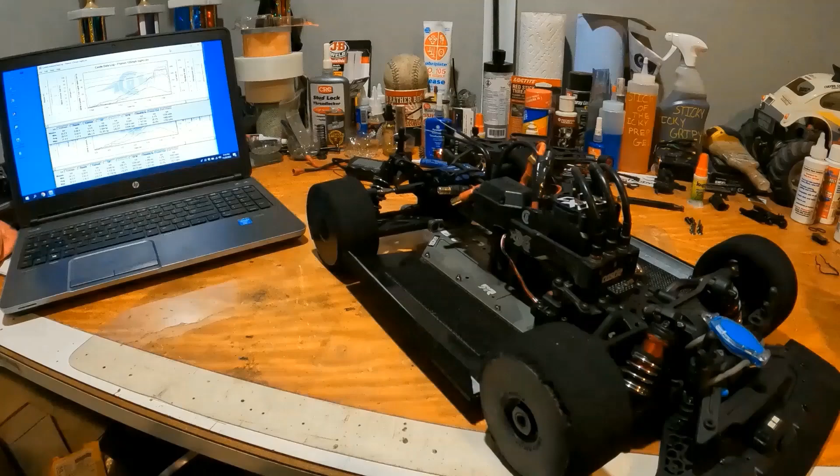What's up YouTube? If you guys want to know about the Typhon build and a bit more detail on the parts on it, how it's set up, and a few things as far as clearances, tolerances, front end, spoilers - I made another run on it the other day and came up with an issue with the front differential, which you'll see, but I did manage to get out and make a better pass with it.

I do have the perfect pass in it now, so after you guys check out this video we'll get back to it - it's just a pass I made the other day. Now that I have perfect pass on, I want to go over some data log as to what I was talking about in the crash video from the other day, as far as the difference between running perfect pass and not, and why I specifically wanted to run it in this car. So without further ado, check out this shot.

Start, stop, read. Oh no, oh crap, there it goes. All right, track, start. Motor check. Yeah, it's good, okay. Nope, back to where you were. All right.

Something's wrong. All right, so here we go for the data log, and I'll try to give you guys a shot of what I was talking about.

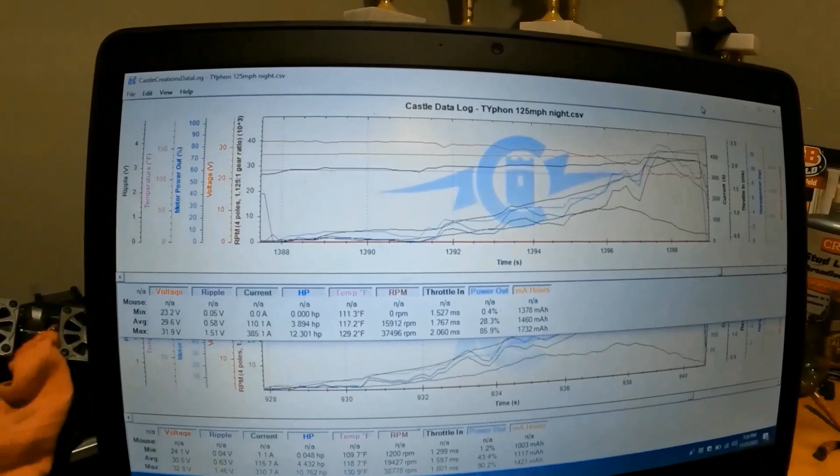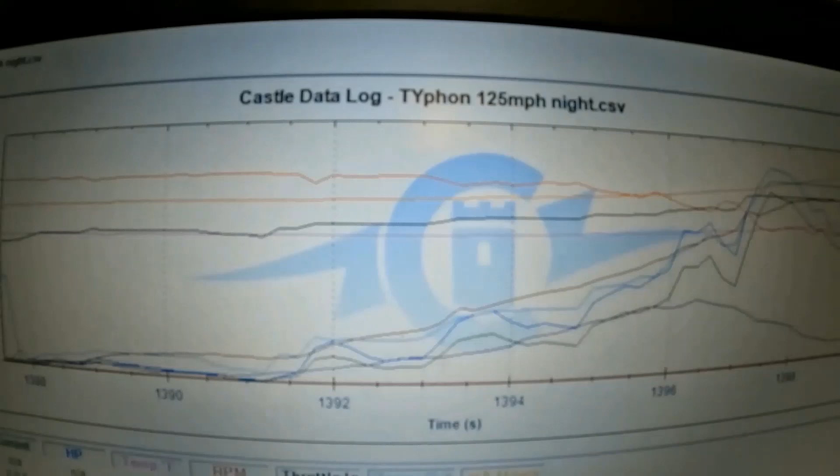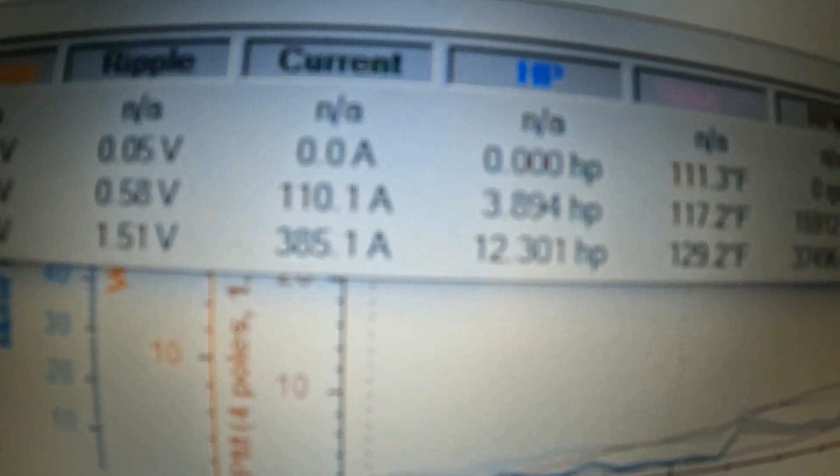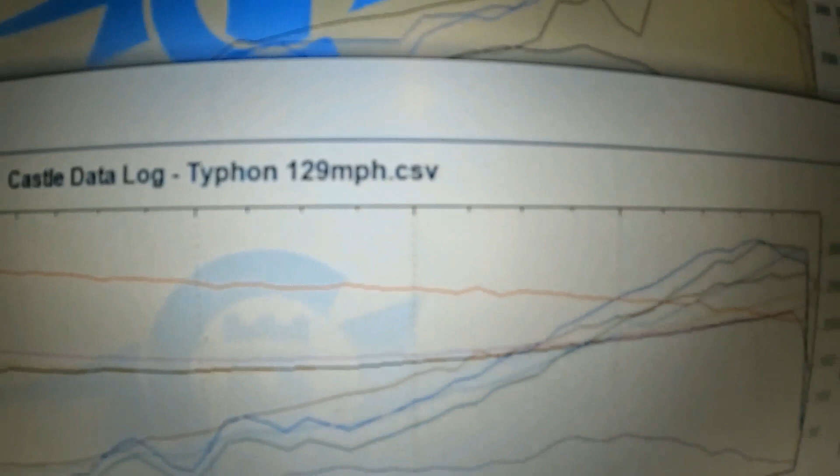So the other day I went and hit 129 miles an hour. This is my 125 pass from the night run video, the first one, which most of you have probably seen. I want to point you toward this amperage - 385 amps at 85.9% power out. Now check this out - this is the 129 pass, and this amperage is only 310.

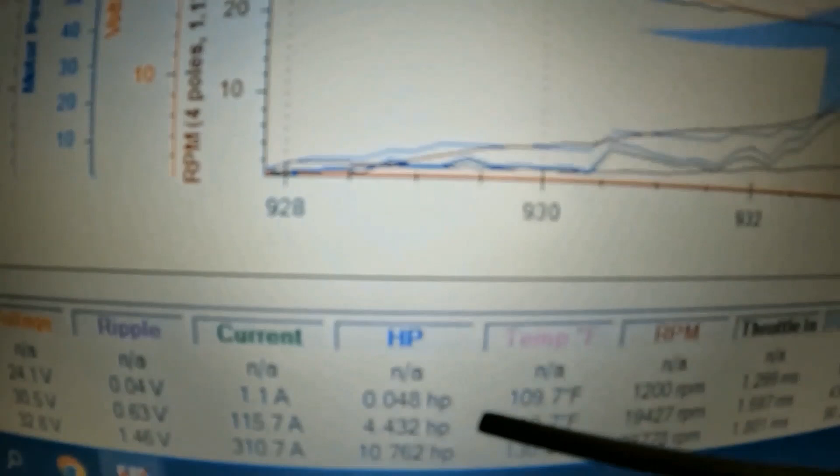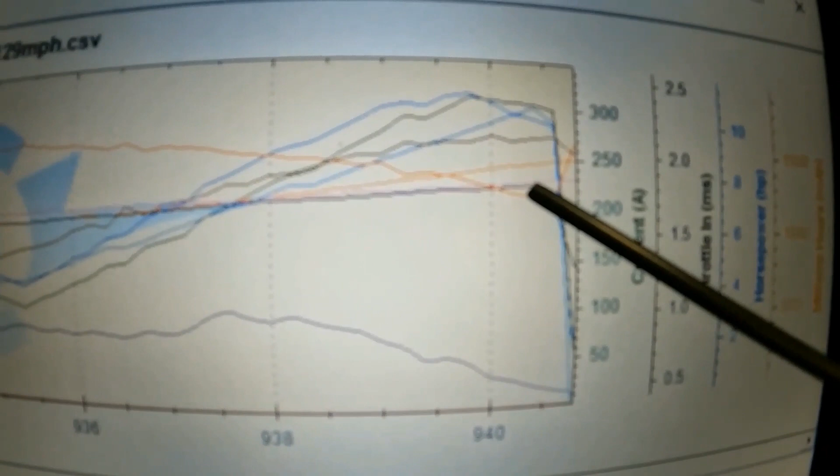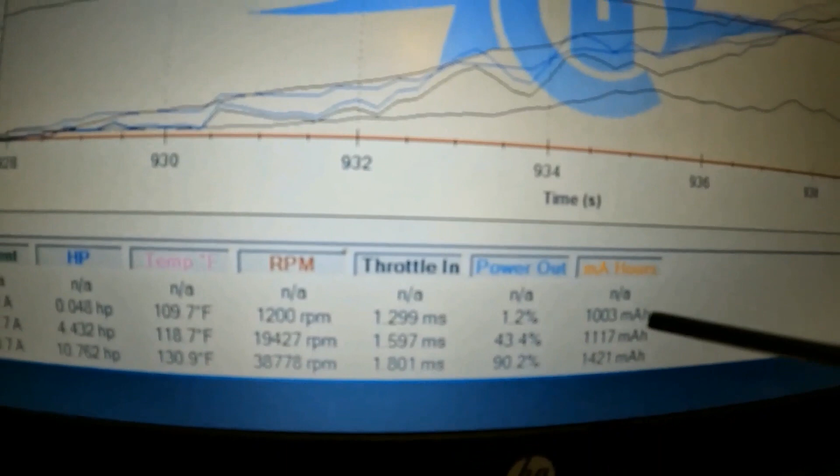So on that note, if you see this black line, it's always linear, nice and smooth all the way up. And guess what - this is at 90% power out, and it only pulled 310 amps. So that is what I was talking about in the other video, in the crash video.

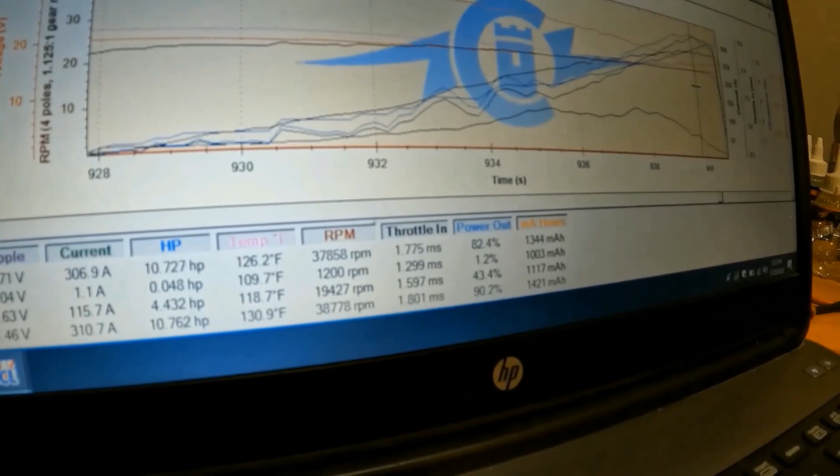To give you guys a better idea, I'm going to put the mouse on 85% to show you, and this is with the same batteries. This pass with perfect pass had fully charged China Hobby Line 6600 milliamp batteries in it, so 85.8 is about as close as I'm going to get it.

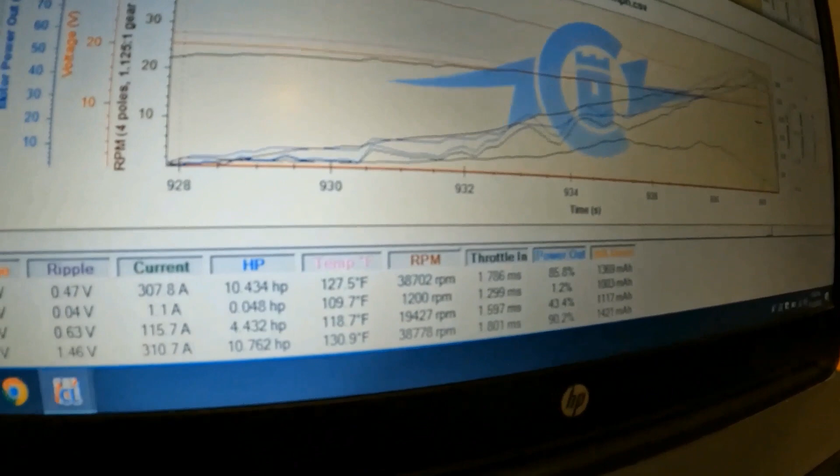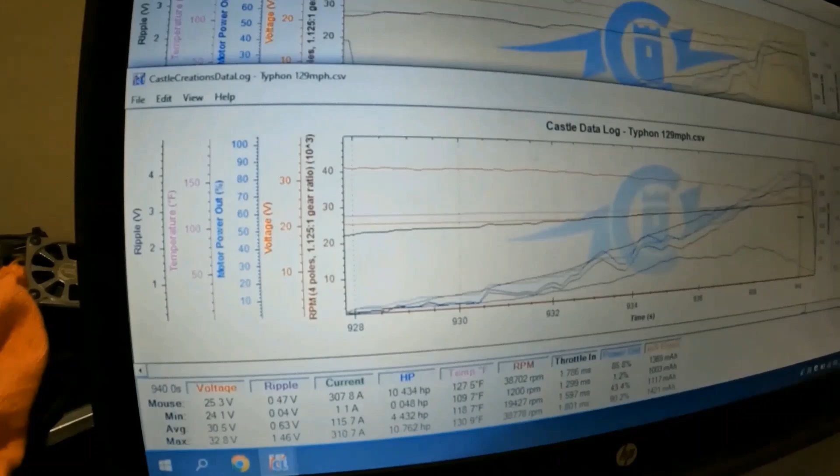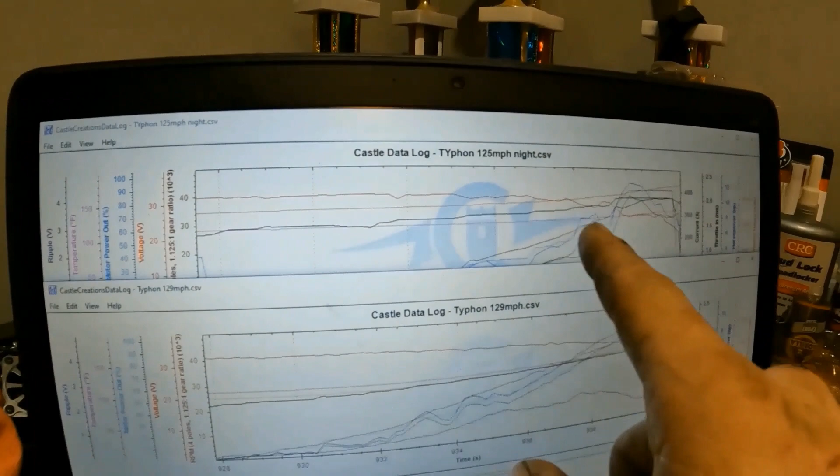These 6600 milliamp China Hobby Line batteries, I was running in both of these passes, so there was no difference in battery, no difference in gearing. It was the same car, same setup, same batteries. The only difference was the 125 pass - those batteries had a few runs on them, some back and forth before that pass, before I made that last one, like I stated in the video.

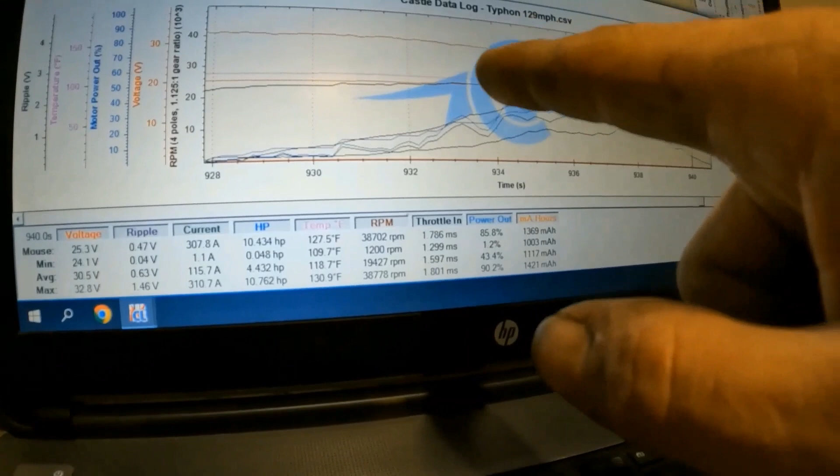There was one short pass with a car coming. Car came out at me in one direction, so I shut down, and then let's see how this goes. 1721, 8S Typhon.

Whew, man. And then I made a second pass - it went 120, but I was pulling hard to the right. It is 10:30 at night, about 28 degrees out, Monday night.

Glad I let out of that one. She was pulling hard to the right.

Alright. See what we did this time. Come on, get over here.

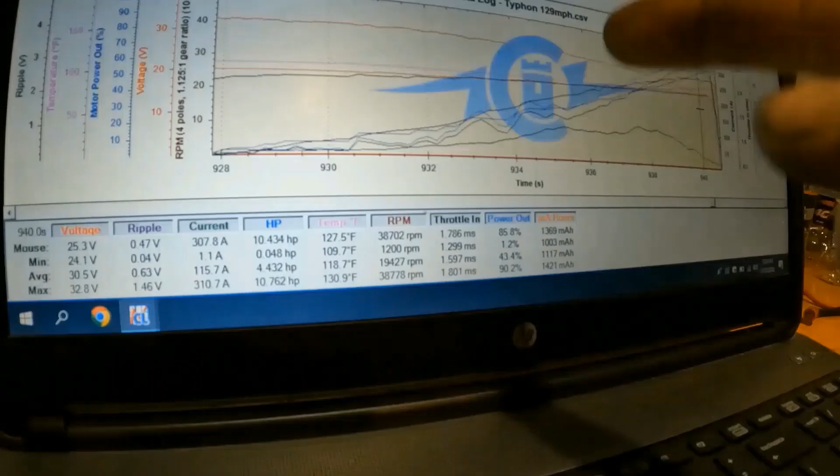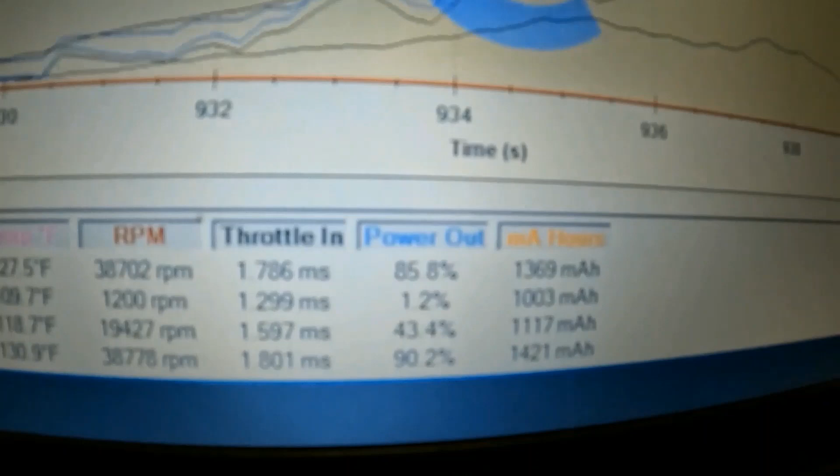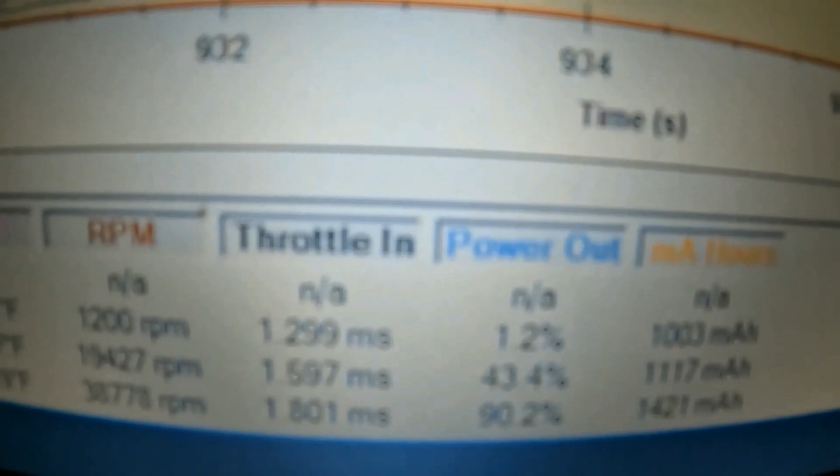And I took my mouse off, so now it's not going to show it, but you guys get the hint. I just showed you, so I'm not hiding anything. I don't have any reason to lie. I do this for fun. I do this because I love doing this.

I am going to go back to that because I want to point out one more thing real quick, very hard to do. Alright, 85.8.

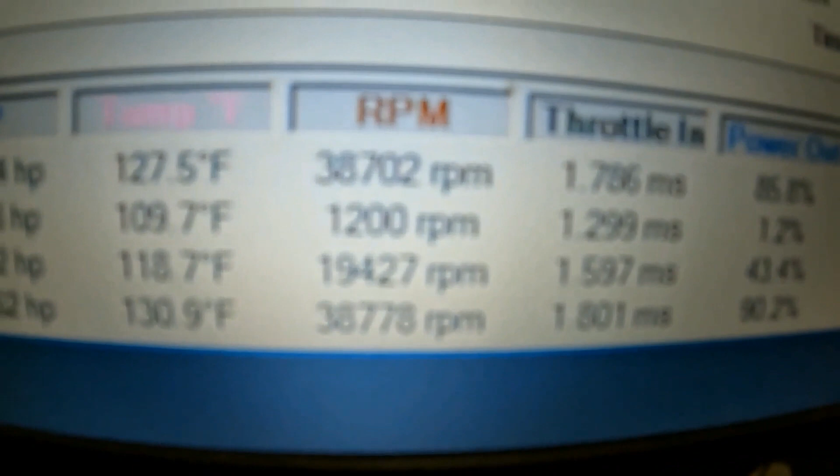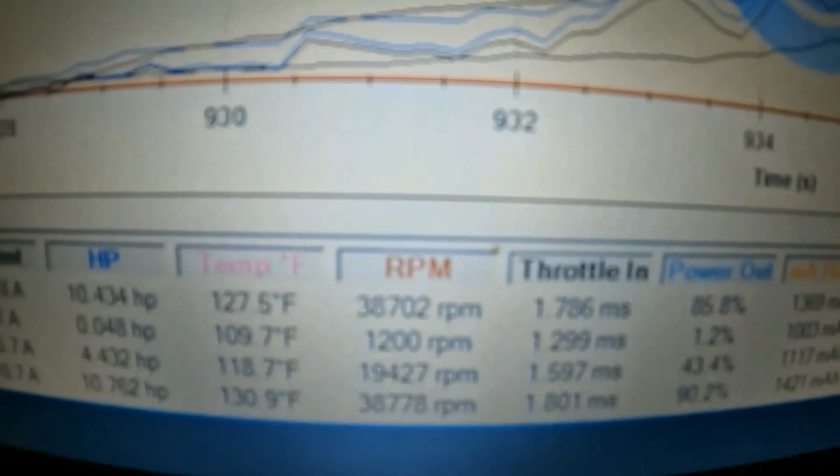38,702 RPMs on this at 85% power out. 38,702. And on this one is 37,496. So there's no doubt Perfect Pass will definitely allow you to go further with anything you're doing.

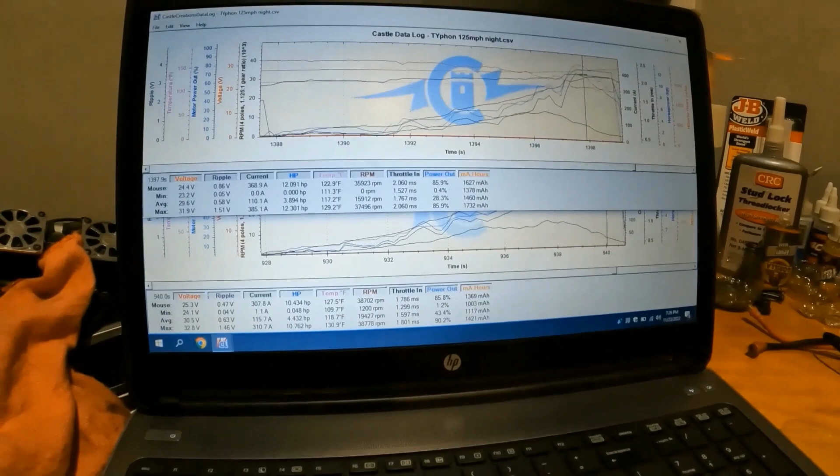Perfect Pass is 100%, it's just an awesome invention. It really is. And this shows that it doesn't 100% control.

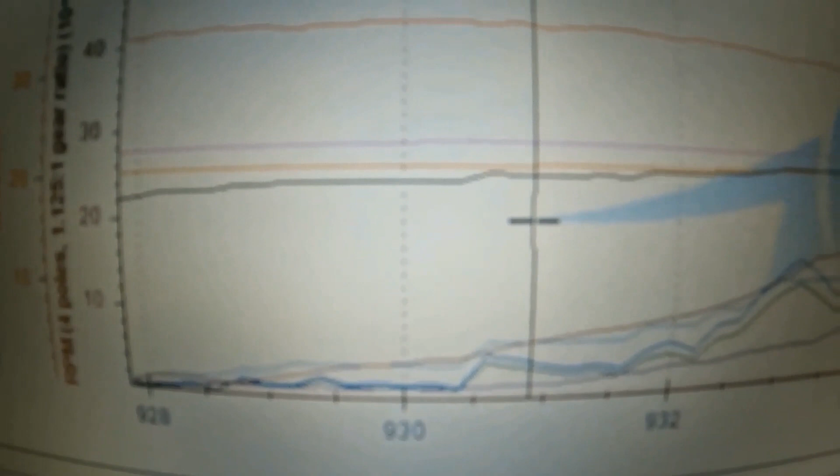I held it here, that's at 8.2. This, I bumped it up, went to 13.3, and then I bump it up again, and that number will stay flat as I move this cursor.

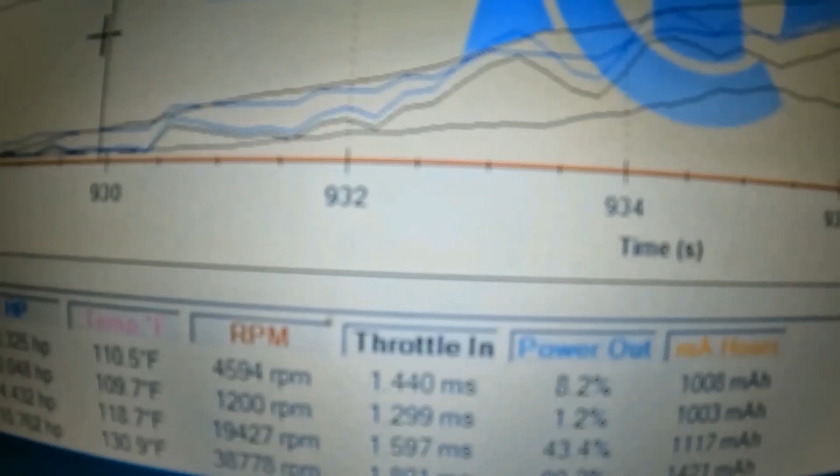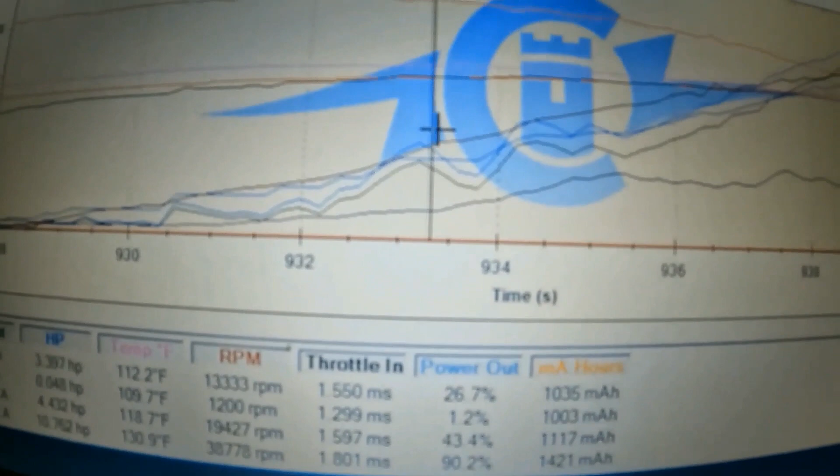So if I go back down, here's holding 8, trying to see, 13, holding, 14, holding, and then I kind of lean into it a little bit more, but I'll bore you no more with that. That is what I was trying to get to.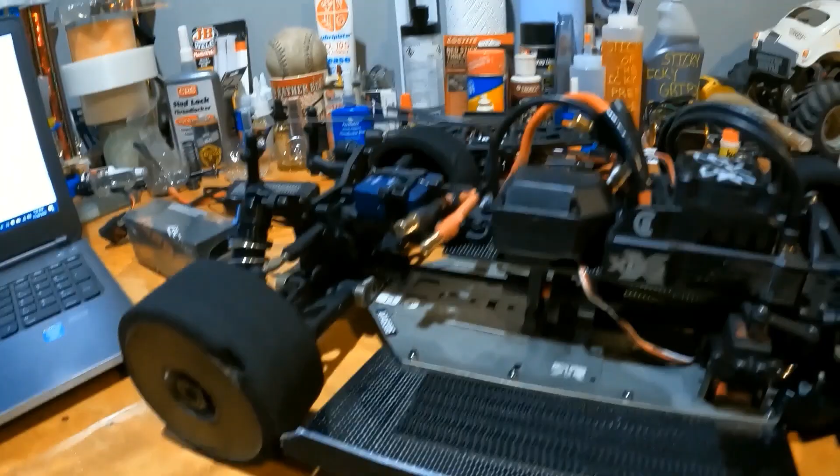So anyway, back to the car. So a few guys asked me about the center plate. It does hold on. I have a screw in it and some double-sided tape on it underneath to hold it down. It does bolt in here.

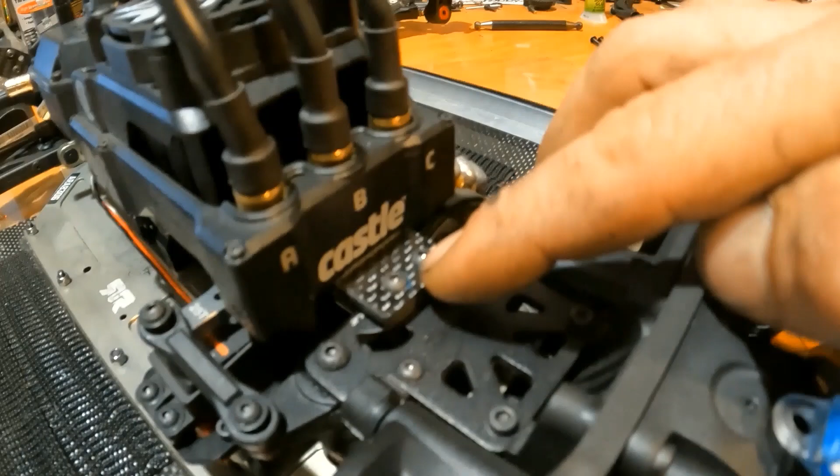I do have a spacer, as you guys seen in the build video. There is a little 3mm piece of carbon fiber spacer to lift this up, because to keep it in line with the center. Now, I spoke to one person, I'm drawing a blank.

To run this plate, you have to buy one of these Hot Racing center diff covers. What you need is the center bolts that go and hold the spool bearings in place, the retainers. And basically this plate obviously gets replaced with the carbon fiber, so you basically make your screw holes through into your retainers, and there you go.

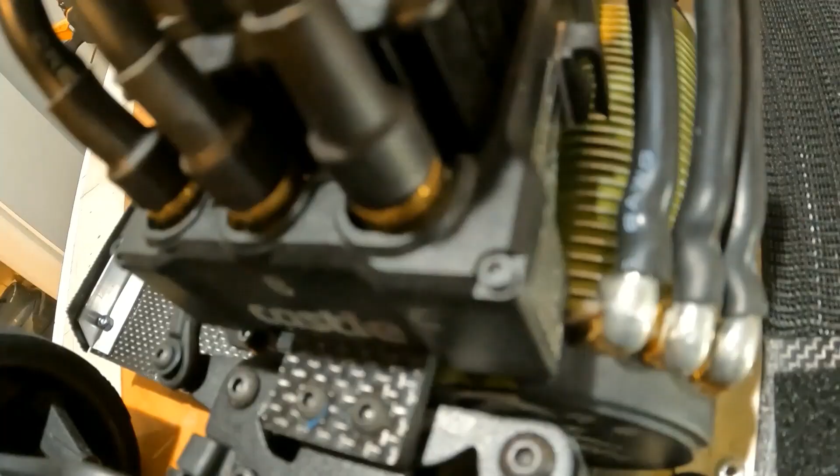So an issue with having the speed controller like this is, one, it is underneath of it. It is not touching the top of that servo, but you are in very, very close quarters as far as where that's going to sit. And also, it's definitely going to touch on these wires here.

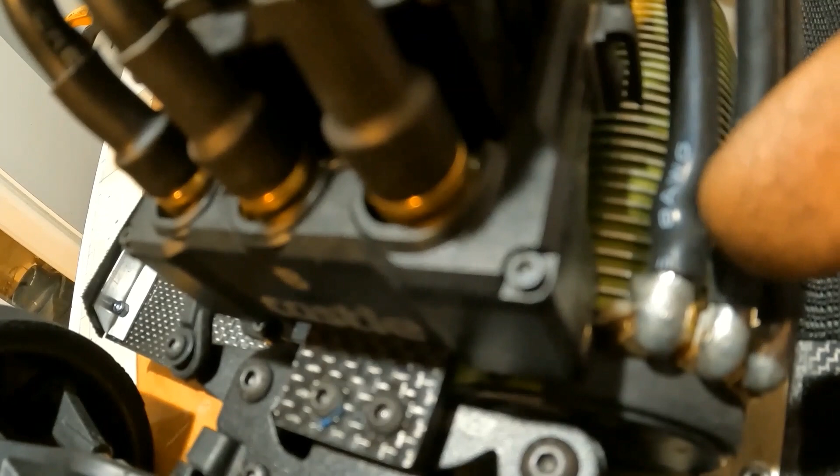If I tried to bring this motor in anymore, my only option is to bring this motor out. So I'm limited, I can't run any less gearing. I would only have one option, is to move out, because of how this sits.

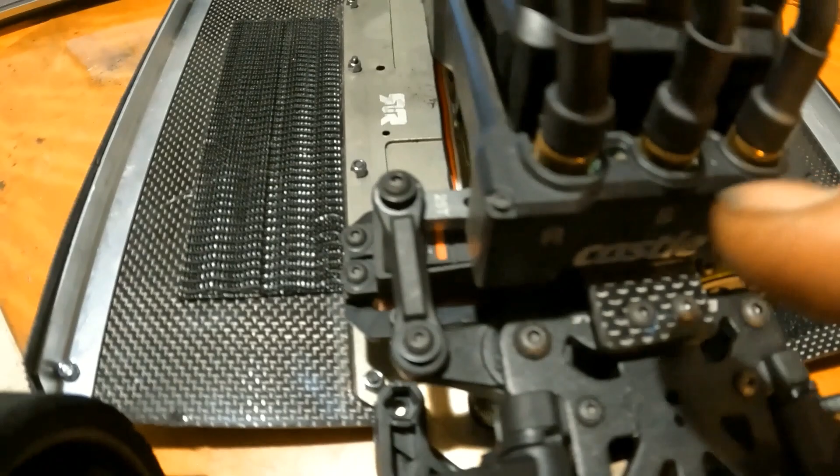So that is center of the speed controller, but you also have to watch your spacing over here with your steering. Now in speed running, you don't run a lot of steering. You still have, even at this, you can see how far that's turned. It's still nowhere near the speed controller, but you have to allow your wiggle room.

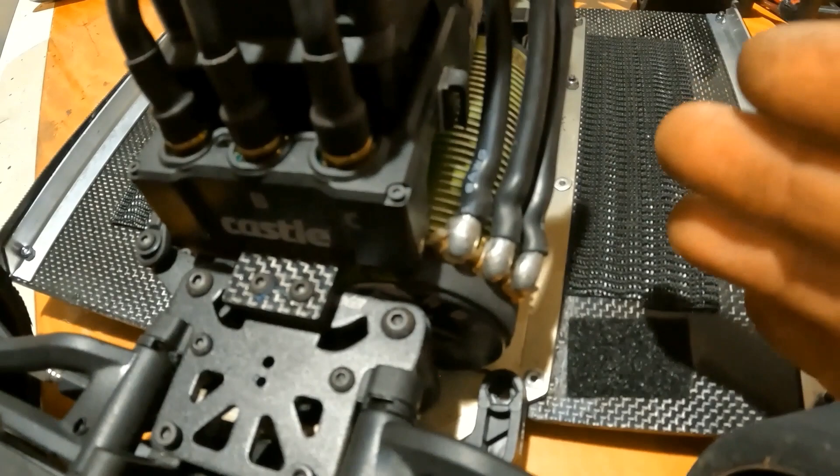Like I said about the motor, it is a tight fit, but that's a 1721, and you could clock the motor, turn the can, the end cap on the can, and probably clock these down. However, I did not do that, because if I run fans, I want to be able to put them here on the side, because I won't be able to run them from the top.

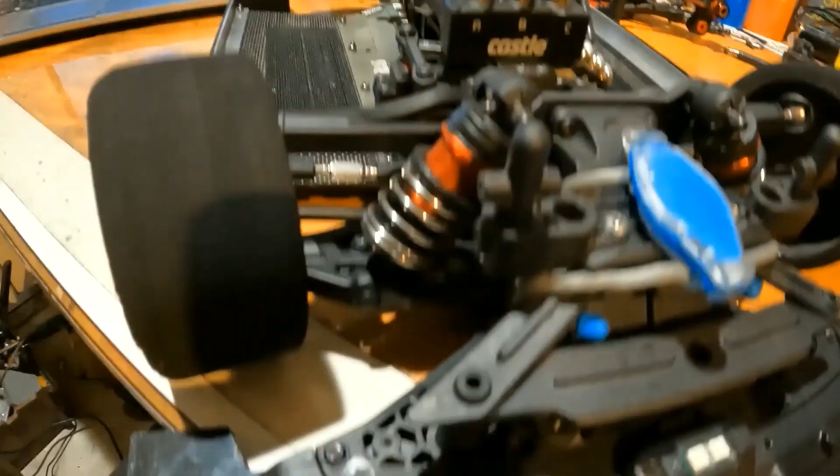Guys, basically this is an Arrma Infraction front end, the same as on Arrma Limitless. The spoiler, this whole front setup, that's Fred. This is Fred. If you ever hear me talk about Fred, this is Fred. I call him Fred, he's my light. He's my night light, I love him.

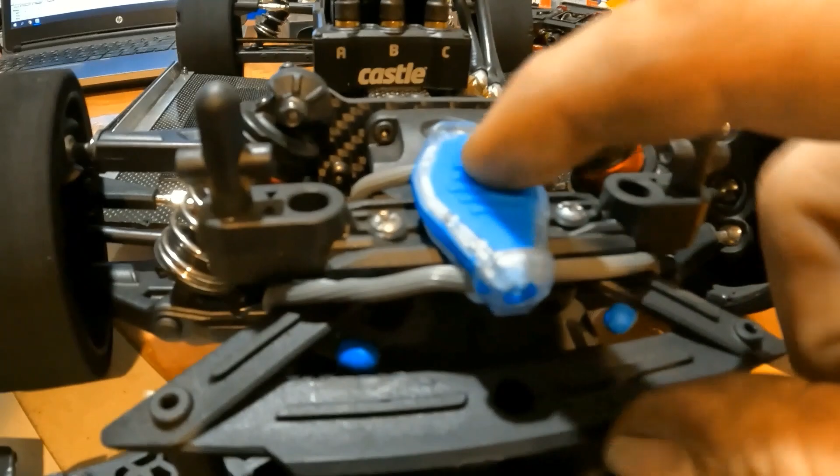Another person asked me about the lights I was running. These are just some drone lights that I got off of Amazon. I bought two the first time, only one worked. I ordered more and got two more in, only one worked. So they're kind of hokey, they don't hold the charge very well, they don't last very long. It's a very quick ordeal - turn them on, run the car, and be done.

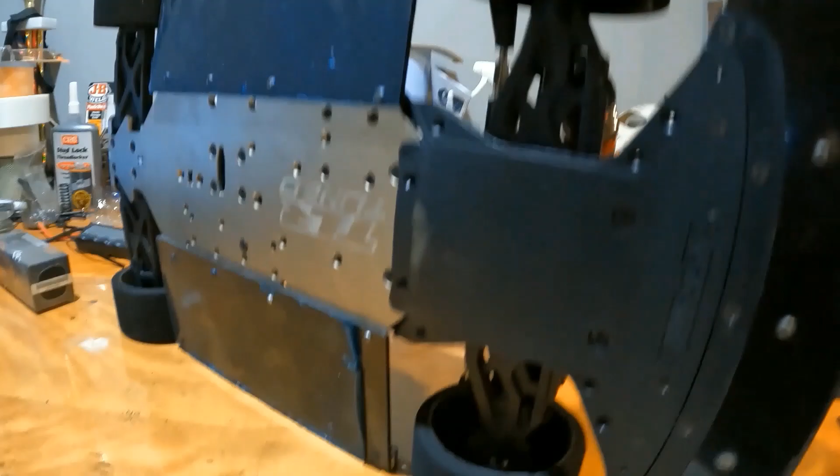But anyway, a few things about running the Arrma Limitless front plate. This plate here, the first one that I took off of the Silver Bullet when I was running this, you can see there's some scrapes. It does kind of scrape a little bit if you're on the brakes. This section here, I cut this out of the last one, and you can see how much I cut out of it.

So that is how much I cut out of the first one, which allows this hump not to be here. So this doesn't hang down as far, it brings it up to here, and it just brings it almost pretty much level.

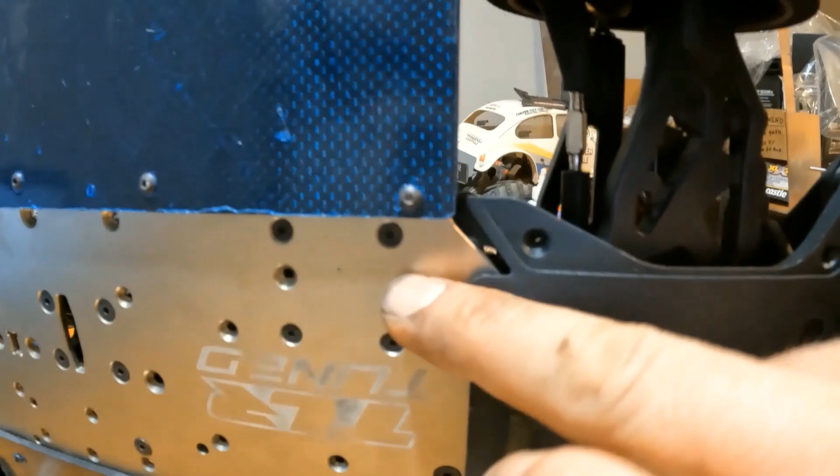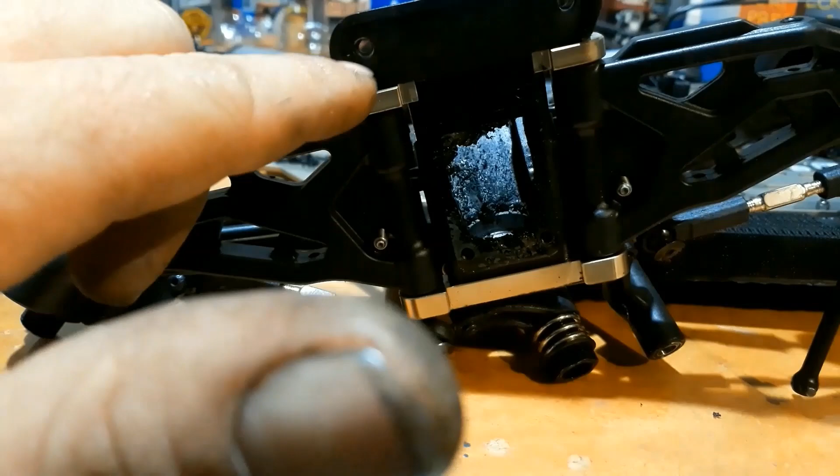The ears, you could drill holes through the chassis if you preferred to. However, there's so much pressure pulling down on it that I just hooked them in there and let them sit on top. But this is all the Arrma Limitless stuff. The only thing you have to do is get rid of the really cool aluminum hinge pin holders in the front. You do not have to change the fancy aluminum pin holders on the TLRs. The TLRs do work, but you have to add this piece in to hold the front support. That is the diff.

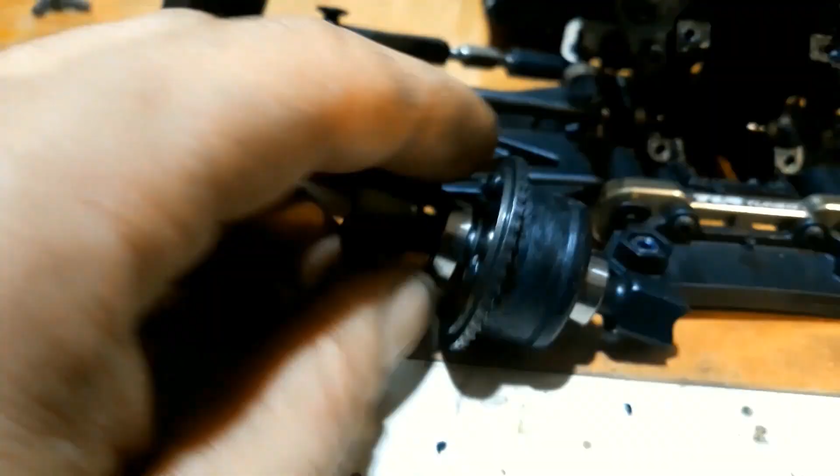The pinion bearing basically just wore right into it. Left a whole bunch of nasty plastic on the chassis, nasty plastic in the cover, all kinds of plastic inside there, and that is what is left of the front pinion bearing. Love it.

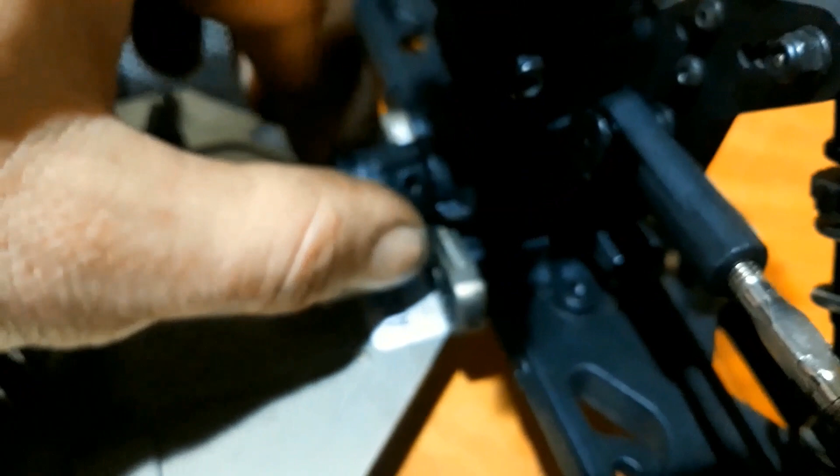Yeah, so the back is still good. Not really any wobble there. That's tight, but for some reason they wasted the front one. So anyway, back to the video.

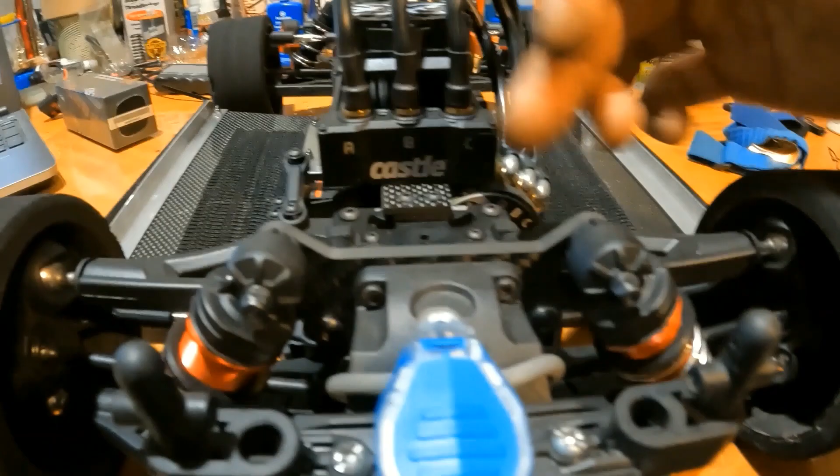Back under here, in order to make it all work, because the Typhon stuff will not work. Because of the way they have their mounts, you can adjust all the adjustments as far as the front control arms, and it's just not going to work. So I just turned it over to a limitless, and basically that's what it is.

To take all this apart, the only thing you have to do is, the way I did it, I took - this is the stock receiver box, obviously you see in the video - I was going to use one of the bolt holes from the diff, but I wound up just drilling a hole into this plate and putting a nut and bolt through it and holding that there.

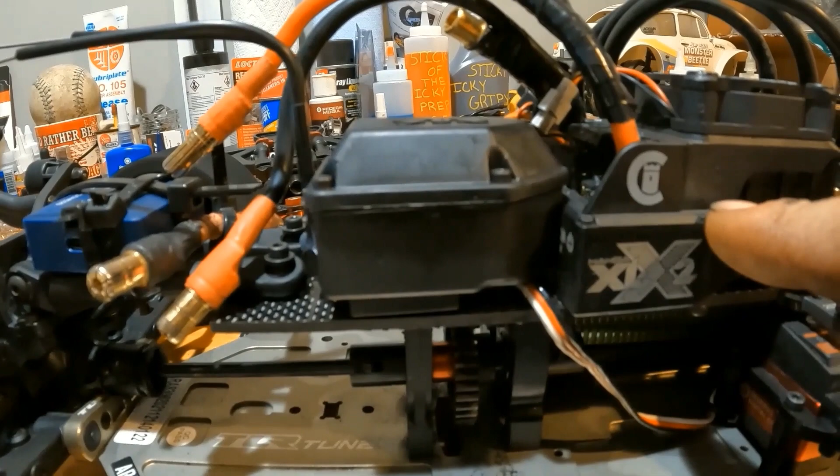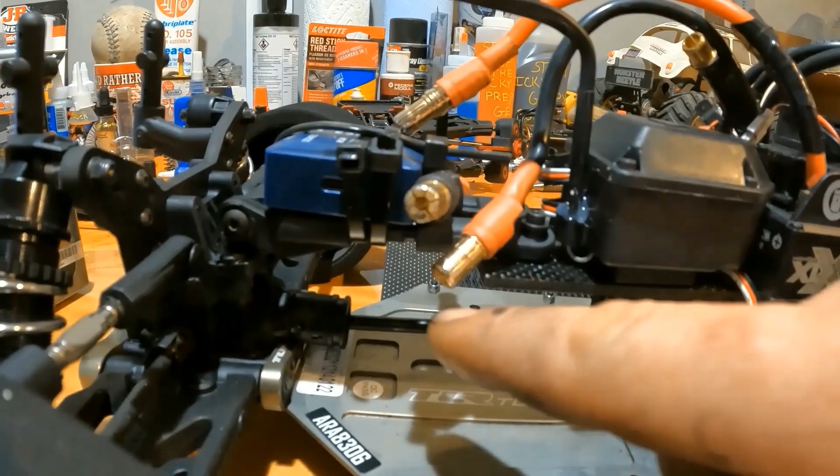So I do have to take that off, which is one bolt, and then you can access these 4 screws without taking the speed controller off, and you can pop this off and then get to the rest of the plate. However, I do have these braces back here that bolt to this plate, which is holding my GPS, which is not going to come out of this car, as you can see.

I have these just to brace the rear end of the car instead of the center stock brace. So I would have to unbolt these, and the 4 screws are accessible after you take the receiver box off.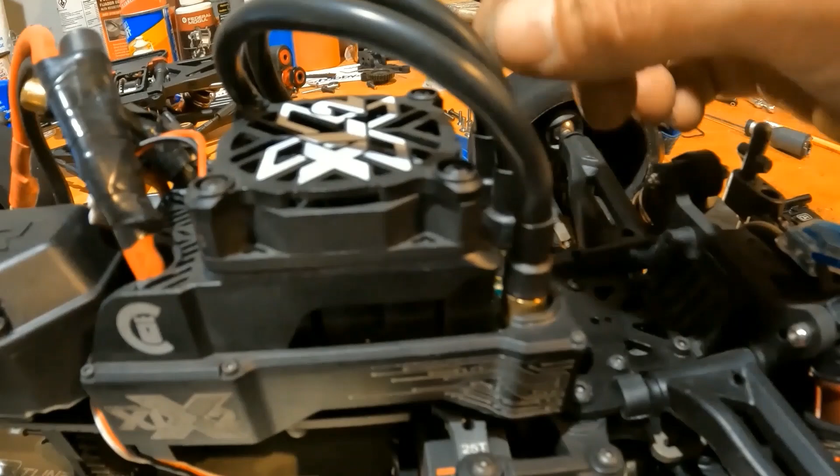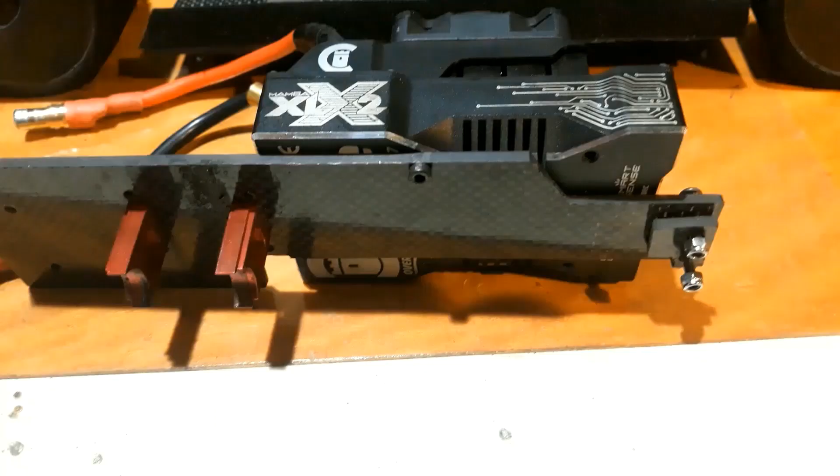And then the speed controller, you could keep that on there, undo your motor wires and unbolt it, which there are 2 nuts underneath the bottom of this. You take the motor out, and then you can access the 2 nuts that are holding the bottom plate onto this plate, and then you can remove the center plate.

So it's kind of, it's not the easiest thing in the world to do. It's not very easy, but it's fairly simple. The receiver box is light. It can stay with the speed controller, or you can just disconnect the speed controller.

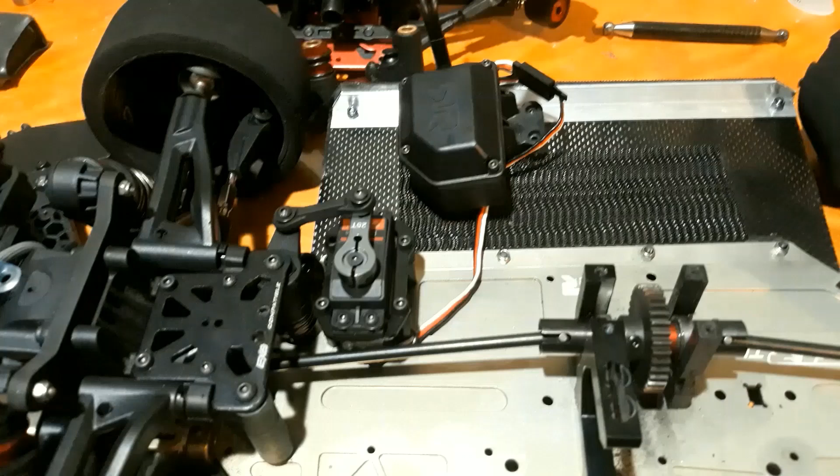Obviously the steering servo wire goes into the receiver box, so that's going to kind of stay with this. So you might want to be able to access it like this and pull the receiver wire so this can stay with the car. This can go with the plate, and then once you do that, it's basically separate.

You could take the plate away, and obviously once you do it enough, you could do it. It's easy.

Anyway, not to bore you anymore, that's the setup, and hopefully I covered all the questions and helped anybody out who's trying to build a short wheelbase.

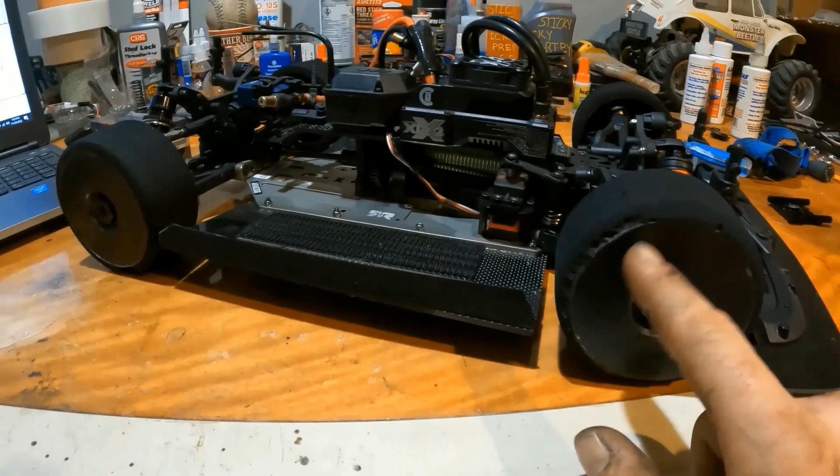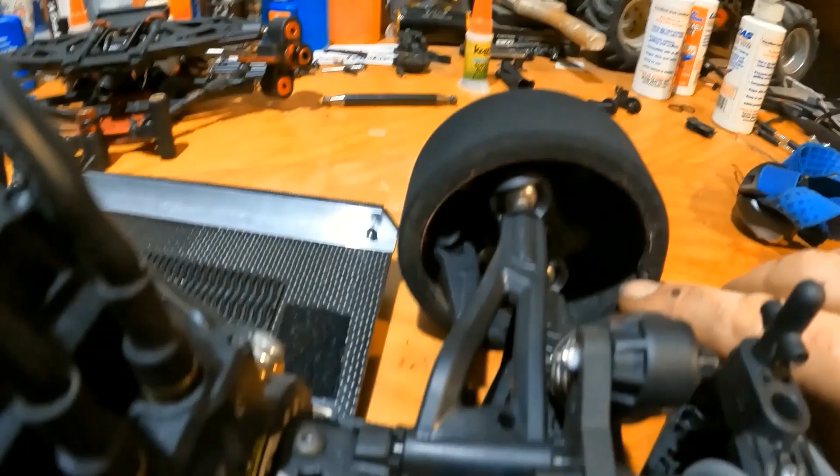And I actually was even running the Silver Bullet tires on this one, being that I was a tire short on the other foams. So I think these are pretty much done now, as you guys can see. These have chunks all over them. This back one has a huge chunk in it. This rim is actually cracked from crashing the Silver Bullet.

But anyway, yeah, hopefully I answered all the questions.